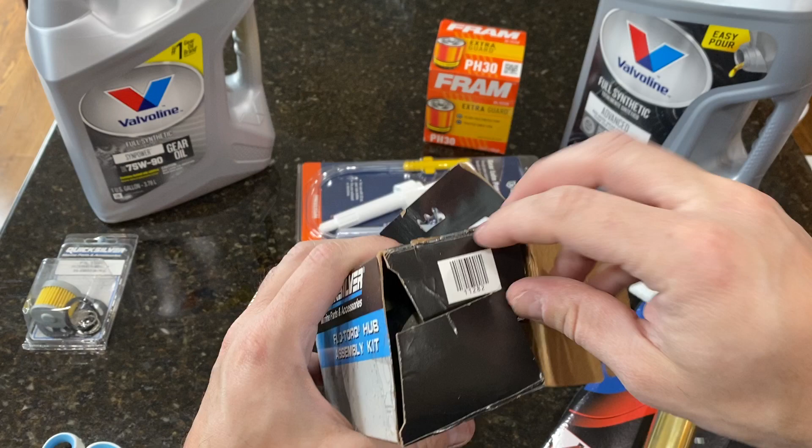Okay, you have your shaft nut, and this one is the one you have the pin to hold it in place. Keep in here. Let's see what else we have in here. Okay, nothing in the box. This is the washer that goes against the gear case.

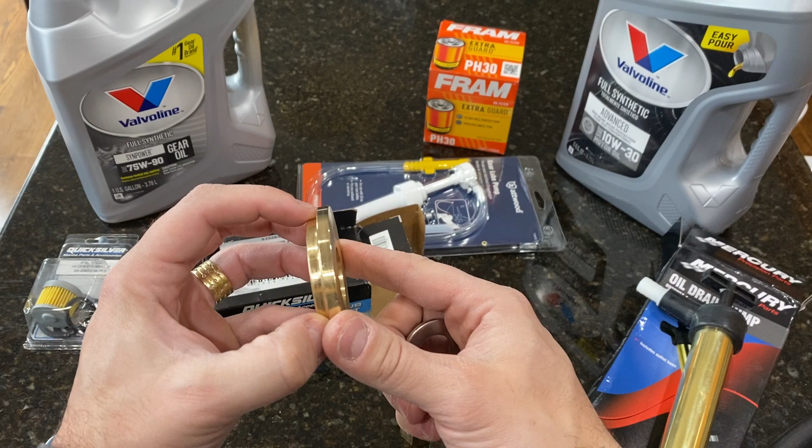Then you have the plastic sleeve. There is only one way that this goes into the prop. You cannot mess that up. You gotta maybe give some tap to get it into the bottom. Normally it goes like this. It hits here. The prop is gonna be mounted in the middle.

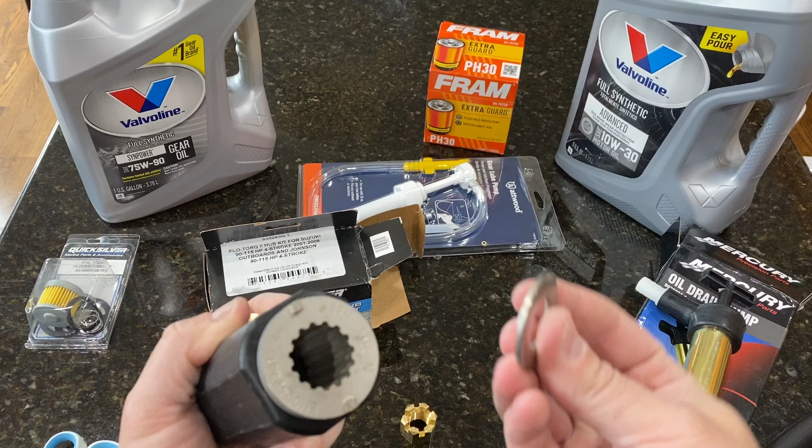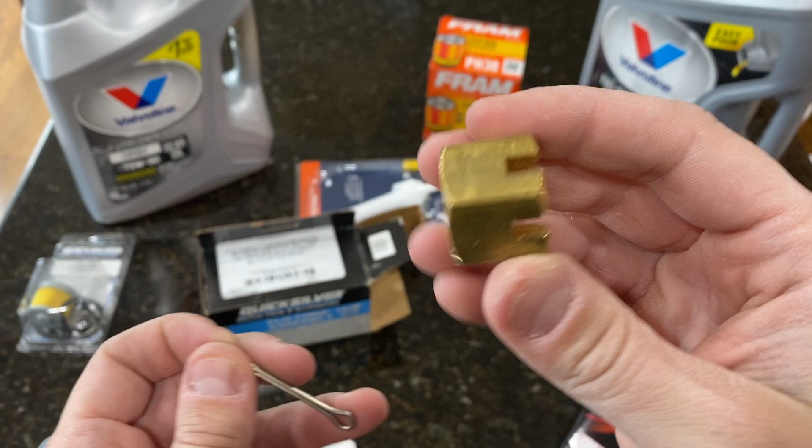And you got a thrust washer here. Might stick this in here. Rotate this. And there is a pin to hold everything in place. Right here. And this is the pin. After you screw this, you're gonna find a place, stick this in it, and it prevents this nut from unscrewing while you're backing up the boat.

Right here in reverse. This is how it goes. Make sure when you replace this piece, it might get stuck in the gear case. It's not part of the gear case. That's how it goes. There is a manual here, installation guide.

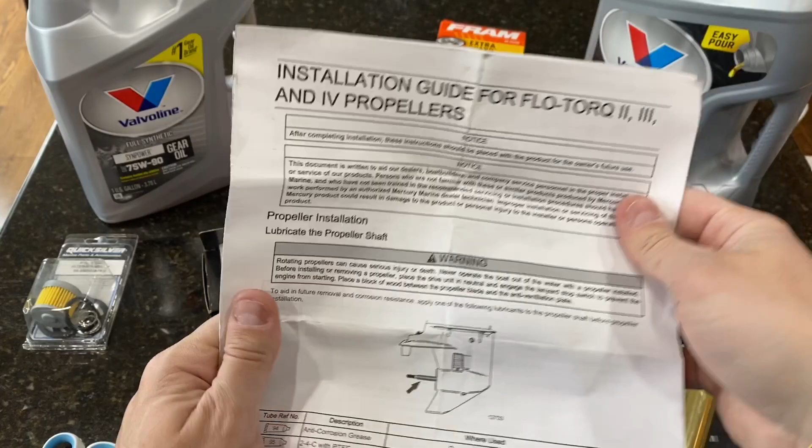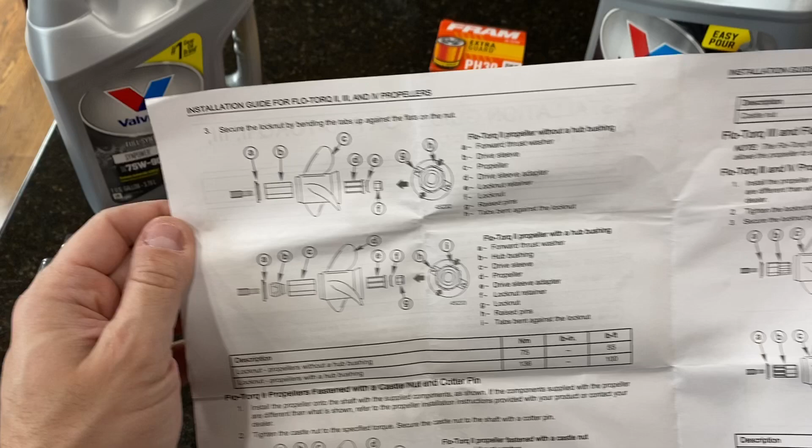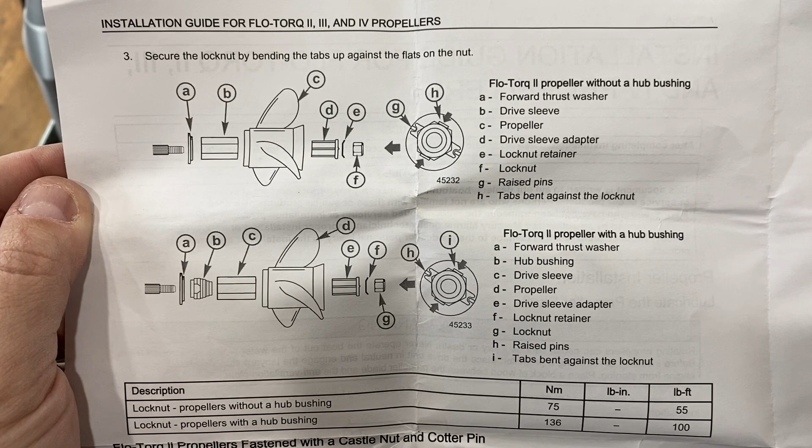That's the prop. It's gonna have a couple of instructions right here. So yeah, as I said, letter A, that's the thrust washer. The B is the drive sleeve, the plastic part, the prop. Then you have letter D here, the drive sleeve adapter, the nut, and then the pin, right?

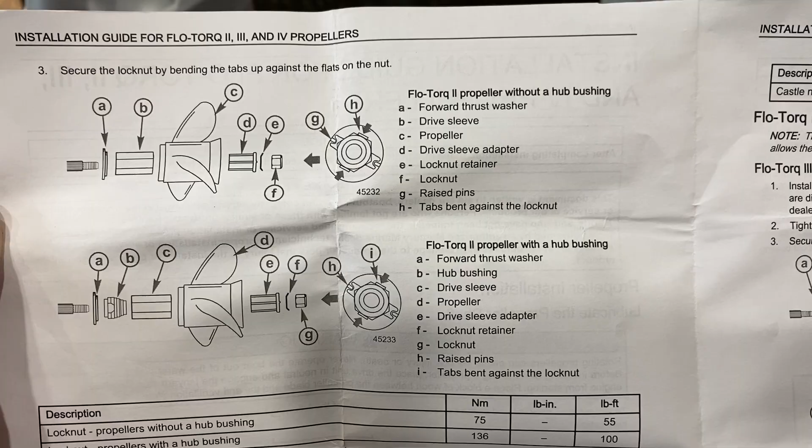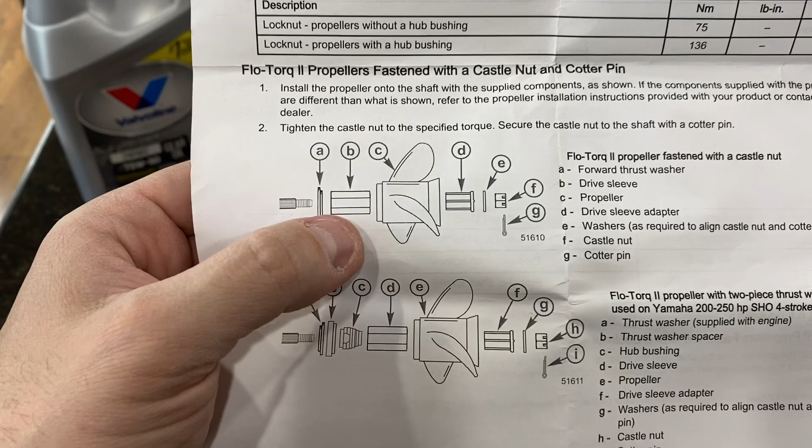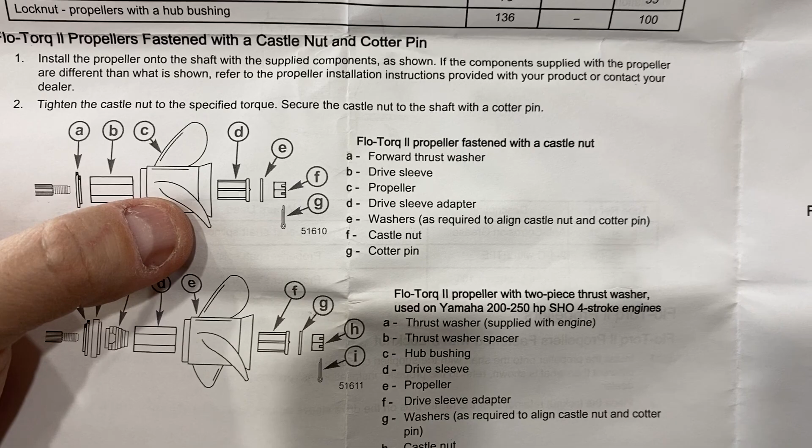This is very straightforward. Follow this order and you're not gonna have any issue. The model that I'm using is right here. So, thrust washer, drive sleeve, prop, drive sleeve adapter, washer as required, not every time, castle nut, and cotter pin. That's how I do it. Should take 10 minutes to change that.